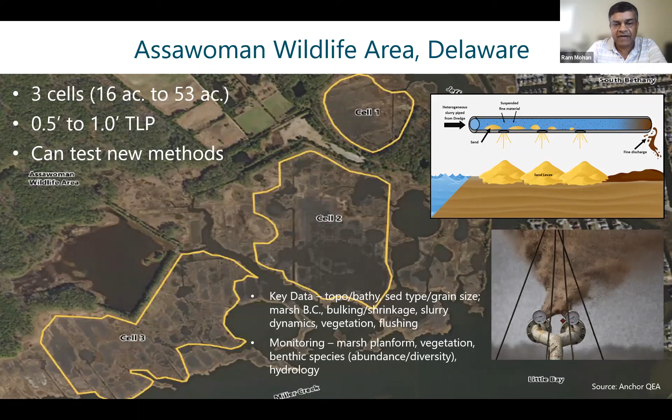I know Catherine's going to talk about Poplar. I'm going to take us back in time, early 2000 when I was involved. We were initially looking at this cell 3D in Poplar Island that you'll hear more about. The only thing I'm going to focus on here is the importance of modeling. So we did modeling in 2 different aspects back in 2000 in the early planning stages of Poplar Island. One was how much do you need to place this material so that it'll settle and give us the elevations we need that were determined from reference marsh surveys.

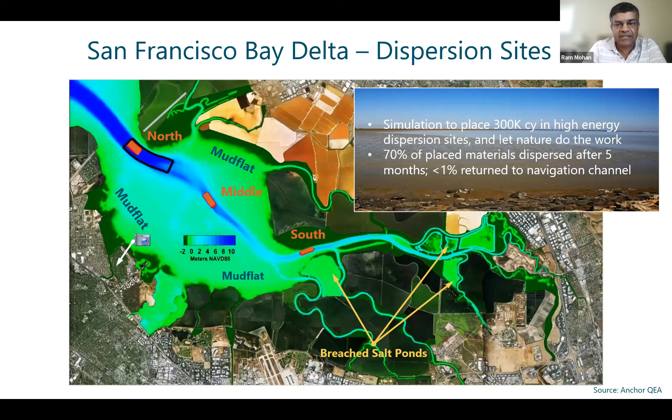But it basically goes from initial planning, assessing risk when you default to nature-based shore protection systems and other features, all the way through design and how monitoring and adaptive management completes the loop by feeding evolving lessons that you then apply to the next design project.

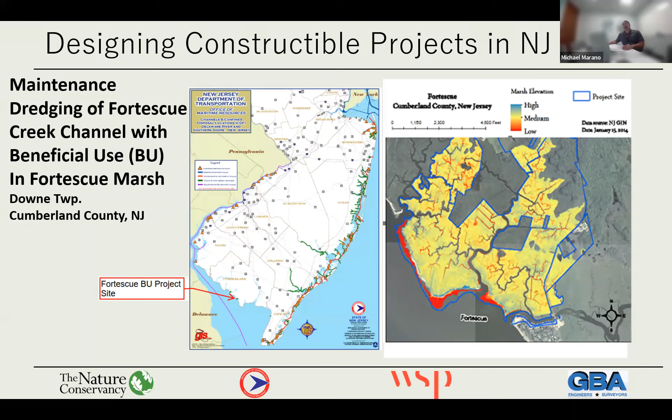Some project partners on this project were the Nature Conservancy and the New Jersey DEP Fish and Wildlife Service. It served the navigational maintenance dredging of one channel, the Fortescue Creek State Channel, and placed about 8,500 cubic yards of fine grain material on the marsh.

About 21,000 cubic yards went in a protective dune that was about 1,100 feet long and about 100 feet wide along the front of the marsh, which actually complemented and protected the more sensitive areas on the interior marsh where we had placed fine grained material.

And then about 7,600 cubic yards in total between two different beach placement areas. One was a non-bathing beach which can accept about 75% sand, and one was a bathing beach that could take about 90% sand. Some of the lessons learned with this project is that placement options are good.

When you have valuable material, the ability to place it in different areas and keep the dredge production as high and as efficient as possible is good for the project and is good for the contractor. So we had available areas to place coarse grain material and available areas to place fine grain material.

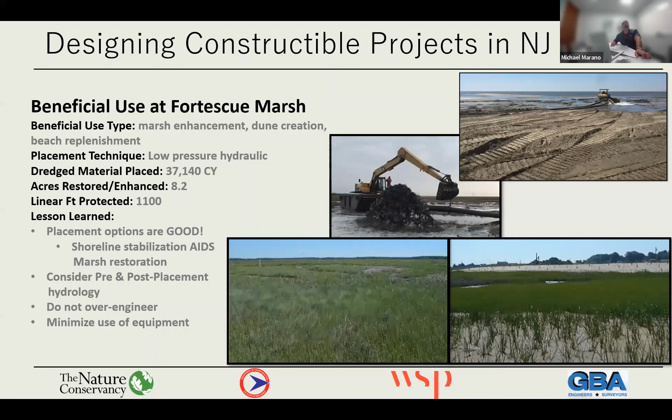Next project I'd like to talk to you about is the beneficial use placement in Good Luck Point Marsh. That is on the mainland of New Jersey, on the Atlantic coast, on the Bay Shore, immediately west of the Seaside Park, Seaside Heights area. That was a maintenance dredging of 4 channels. The project partner on that project was the Edwin B. Forsyth Wildlife Refuge, which is a national wildlife refuge. We placed about 4,000 cubic yards of fine grained material on the marsh and about 8,000 cubic yards of coarse grained material in the near shore berm.

The marsh placement area is shown on the far right. Near shore berm is shown in section view. We enhanced about 5.2 acres of marsh and about 750 lineal feet of near shore berm that was placed. Some lessons learned were, if I go back one and annotate, bear with me, I'm a rookie at this.

In this area here, this is the near shore berm area, and that is Good Luck Point right there in the Barnegat Bay. So we placed material in a berm without any kind of containment or training dikes or anything, and just let the coarse material flow and moved the spill barge along the length of this permitted placement area. And what had happened was, either during or very soon after the placement, a nor'easter came through and moved that sand just right offshore.

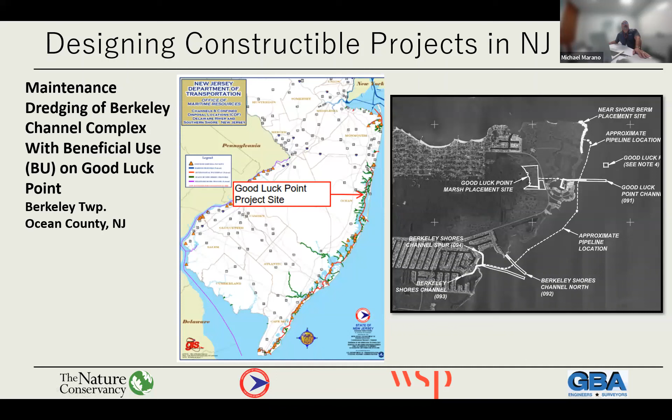So one of the lessons learned was to know the project area and have a better understanding of the currents and the risks. It's kind of hard to predict what a storm's going to do, but maybe do a little bit more modeling in that area, to know how we could better place that sand to stay in place.

The image to the right was an impounded salt marsh. Bayshore Avenue is located here immediately to the east. The Barnegat Bay is also further to the east. And this has a very small micro-tidal environment, like a 6-inch tide swing. The hydrology of this site is only supplied by twin 15-inch pipe culverts in this location and a 36 to 48-inch pipe culvert in this location. So it's not very forgiving. If you place material in a mound, it's going to stay there on this site.

And one of the things that we did learn, as you can see in the picture in the center bottom, is we had to move the inflow pipeline around in order to get good sediment distribution. And one of the added benefits that the contractor found out is that as that pipe moves around, it actually worked as a level and can level out some of the higher mounds as the sediment was placed.

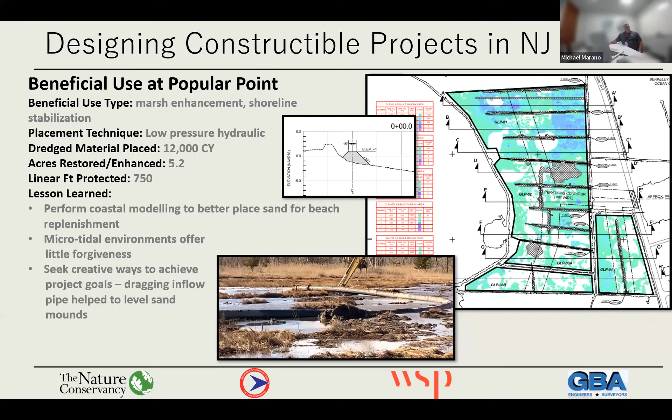Next project is a project that's in development now, and that is the Popular Point project. In the image to the right, the bridge in the upper right is the Route 72 bridge into Long Beach Island. So we're just immediately south of there. Project partners there are the Edwin B. Forsyth National Wildlife Refuge. Again, they own thousands of acres on the New Jersey coast that can use sediment and BU projects. And that development immediately to the north of the project area is Beach Haven West, in Stafford Township, New Jersey. Those lagoons have a large amount of maintenance material that needs to be removed. So they may end up donating some material for beneficial use for this project as well.

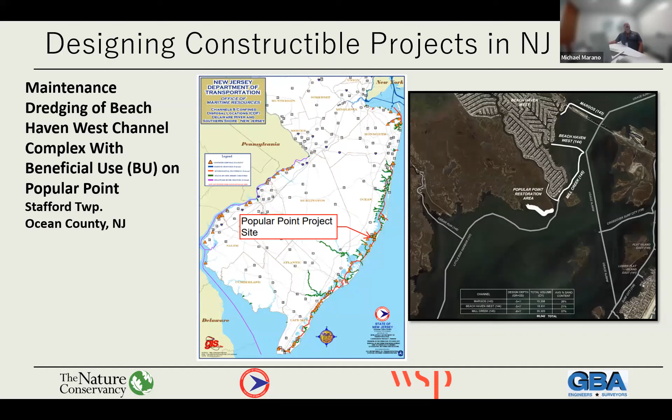The image to the right there, there's marsh enhancement and shoreline stabilization. There are about 4 to 5 state channels that have a dredging need in the area. It's predominantly fine-grained material, except for one of the channels. And the image to the right kind of is a heat map of the fill of the entire site. It's about 125 acres of the marsh proper.

If we do find some coarse grain material, we have the design that's kind of shown in that middle image there, where there is a very low level stone sill, and that's to help with wave attenuation as well as to retain the coarse grain material. Offshore, that follows that yellow alignment. And then there's about 16 acres or about 60 to 65,000 cubic yards of coarse grain material that proposed beach area can house if we do find or have coarse grain material that needs to be beneficially used.

And then the orange outline is a protected dune similar to Fortescue, where you have a good sound shoreline stabilization element to a marsh restoration element behind it, which provides added protection and benefit. Project status right now is permit submissions coming up this fall. Dredging and placement, hopefully summer and fall of next year.

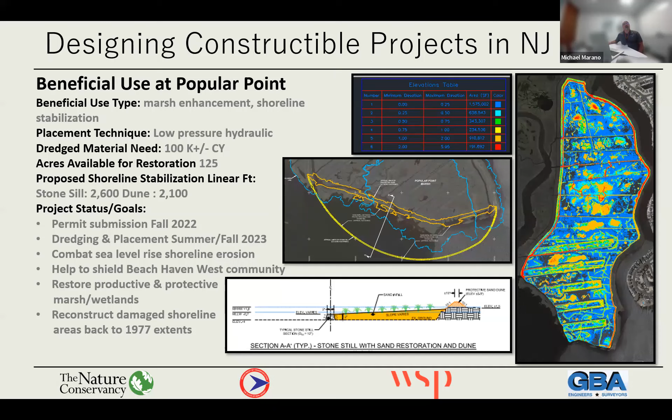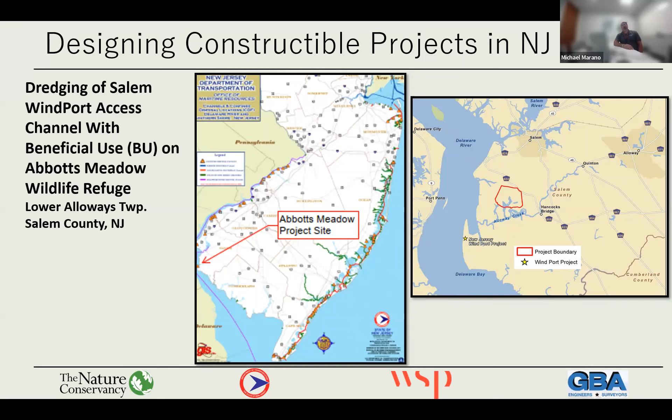And then the last project that I'd like to present to you today is the dredging of the Windport Access Channel with beneficial use in Abbott's Meadow Wildlife Refuge. That's on the Delaware Bay side again of our great state of New Jersey, as shown in the left image, and on the right image is a close-up of the project area. Project partners in Abbott's Meadow are also the NJDEP Fish and Wildlife Service, as well as the New Jersey Economic Development Authority. Main element here is marsh and habitat restoration.

Again, it'll be a cutter suction pipeline dredge, typically much larger than what we're used to in the shallow draft navigation on the Jersey Shore, since it's about up to 1.2 million cubic yards of material that may be used on this site. So it'll be a larger dredge. There's about 330 acres right now identified for restoration. And some of the status and some of the goals are the permit submission is coming up in fall of '22. Dredging needs to be complete by December 31st, 2023.

And because of the sheer size of this site, as well as the size of the dredge that we anticipate may do it, there'll be some adaptive management activities through the spring and summer to try and maximize the habitat creation on this site. One of the main goals is to restore habitat for sensitive bird species, including the black rail and possibly the saltmarsh sparrow. And again, restore the wetlands and restore some diversity. If you see in that image to the left, there is some green, but it's mostly mud flat, and to restore high marsh, low marsh, and some upland.

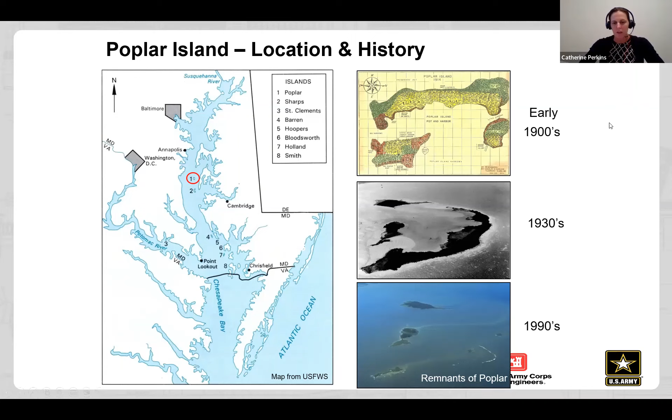And over time, due to erosion, by the 1930s time period, many of the full-time residents on the island began to move off to the mainland of Maryland. And by the 1990s, there were several remnants of Poplar Island left that totaled less than 5 acres in size.

Next slide, please. In the mid-1990s, the Army Corps of Engineers partnered with the Maryland Port Administration and determined that an environmental restoration project utilizing clean dredge material would be an excellent way to provide placement for dredge material and also restore remote island habitat in the bay. So this is an environmental restoration project. That's how it's categorized, but we do have 3 goals that we treat equally.

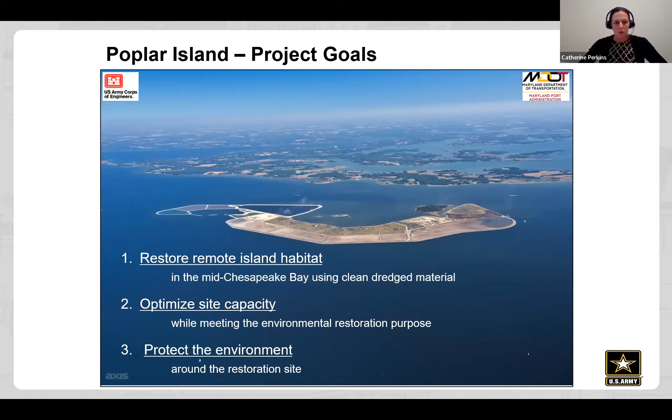While we're restoring habitat, we also are optimizing site capacity, and it's receiving dredge material annually from the Maryland approach channels to the Port of Baltimore. And our 3rd goal is to do no harm to the surrounding environment. Next slide, please.

Poplar Island is currently at its full final size. It's about 3 miles long, and it has been restored to more than 1,700 acres total. The goal is to develop 50% of the site into uplands and 50% of the site into wetlands. We've had about 20 years of experience. The first wetland was restored in 2003, and you can see that was a smaller site, about 25 acres.

And then we've had 8 wetland planting design contracts since then. And our most recent was in 2018, and that was our largest site to date, about 85 acres. Poplar Island is broken into these various cells that you see here to make it easier for them to be developed and constructed. Each of the wetland cells receives about 1 million cubic yards of material.

And I should also mention this is a contained site. The perimeter is constructed of armored sand dikes, and then the dredge material is hydraulically placed into the inside of the cells.

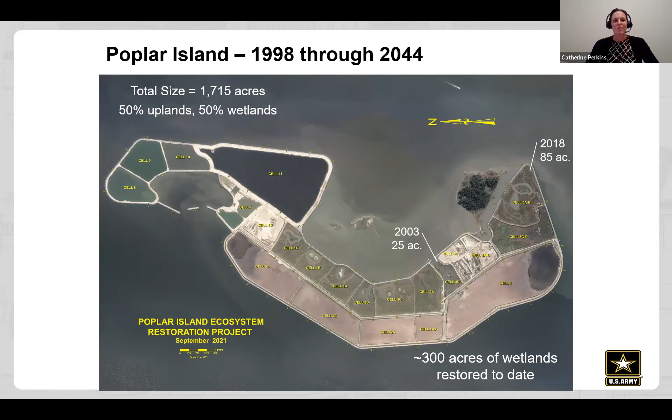My experience: I started working for the Army Corps in 2008, and I was the civil engineer that worked on many of the grading plans and wetland design contracts for 6 out of the 8 contracts we've done to date. And following that, I worked for 5 years as a project engineer, overseeing much of the construction of our recent expansion. And I am currently the project manager. So we've restored about 300 acres of wetlands to date, and we have about another 350 to go. Next slide, please.

I wanted to share the general wetland cell development timeline because it is much longer and much different than many of these other projects that we're looking at. As I mentioned, each wetland cell receives nearly 1 million cubic yards, and that's typically inflowed in several cycles. So about 1 to 4 years is required for the dredge material inflow. And then next, please.

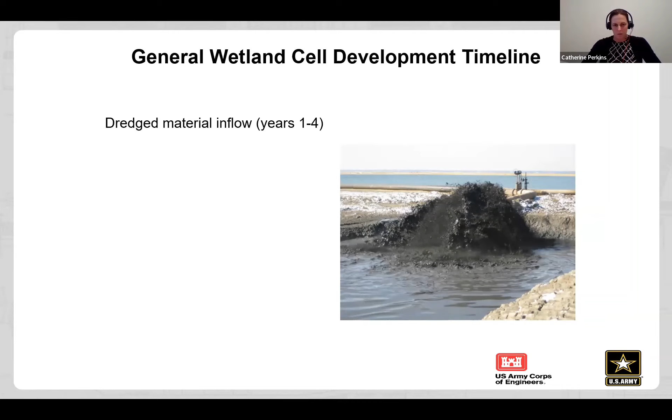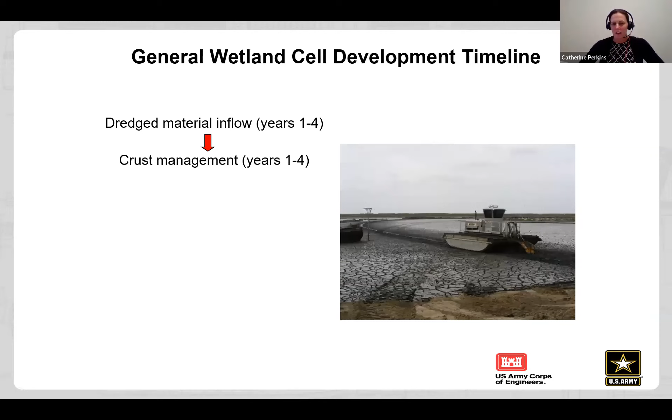And then there is the activity of dewatering the cell and performing crust management. That's because the dredge material that comes in is unloaded and hydraulically slurried and then pumped back onto the island. So that's why in that first picture you could see it's a high percentage of water. In years 4 and 5, we then have the channel excavation and the marsh plain grading. And then after about 6 years, we are finally ready to do our planting.

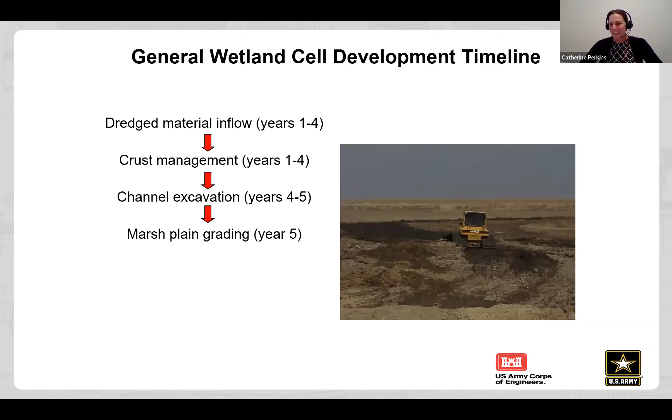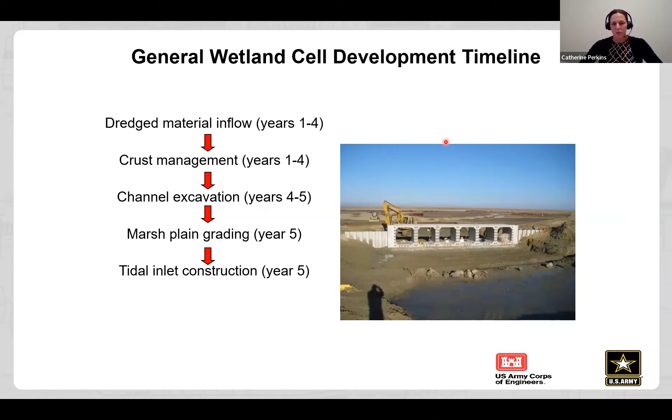Next slide, please. So when I talked to the team about what they thought the primary lessons learned were over the past so many years, we had 3 main categories: the elevations, the actual planting activities, and then contract administration. So first, to focus on elevations, next slide, please.

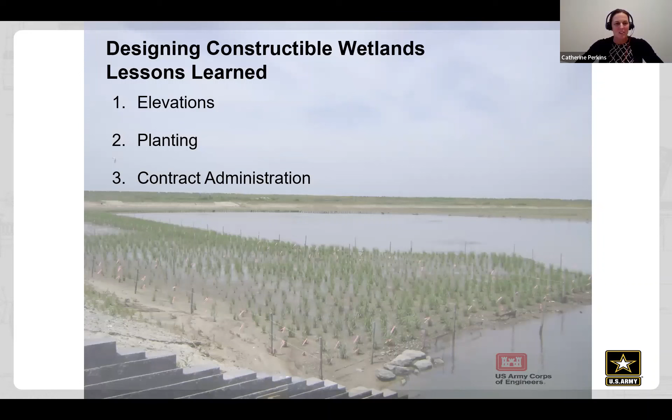We've heard over and over the absolute importance of getting the elevations correct. And we put a huge amount of effort into surveying where the current plants are growing. When we first started, we looked at reference marshes in the area, but now we are lucky we have the advantage of having several hundred acres of wetlands on site that we can monitor on an annual basis and see where specifically the high-low marsh break line is. And we have seen it creep up quite a bit over the decades due to sea level rise.

We also spend a lot of time with our engineering team looking at the dredge material consolidation and settlement, and we do annual assessments of the material and the water content, and there's an exercise to estimate void ratios and determine which areas of our wetland cells are going to settle and which ones are more stable. And then we develop the grading plan based on coordination with our engineering team.

We typically have several iterations of this grading plan, and our recent focus has been on positive drainage and minimizing ponding of water on the site. We used to have just a low marsh elevation and a high marsh elevation, and we would just do flat plains where the low marsh would be one elevation, then you would have a physical step up to the high marsh elevation. And we've recently eliminated that step, and for the past 15 years or so, we've really focused on building high. We often give the construction partners plus tolerances for the target elevations, but no minus tolerances.

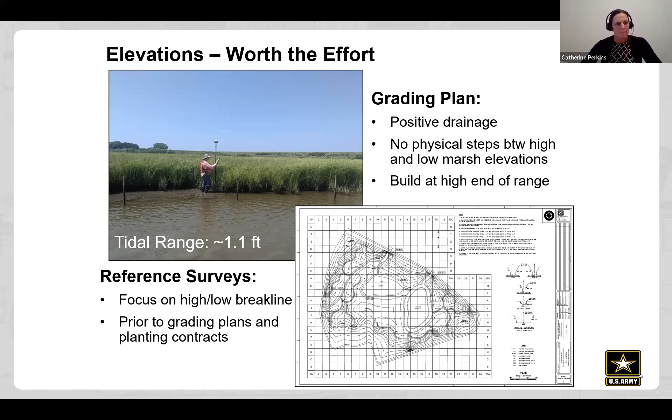The next thing was the actual planting itself. When we start to do our concept design, we engage our partners very early. We just had a meeting 2 weeks ago for our next wetland design, and we presented a concept for planting that's going to take place in 2027. So we really try to start early and get feedback on what our research partners are seeing on the ground, both at Poplar and at other sites around the bay.

One lesson that we've recently taken into account is always including high marsh around the perimeter of our site. For the low marsh, we typically plant Spartina alterniflora, and this gives the low marsh room to move back and retreat to higher ground as we see this increase in sea level rise. We've also had a recent focus on including more diversity of high marsh plants. And when we utilize woody vegetation, we try to use it in a way that we are working with the environment to create natural windbreaks for different habitat features.

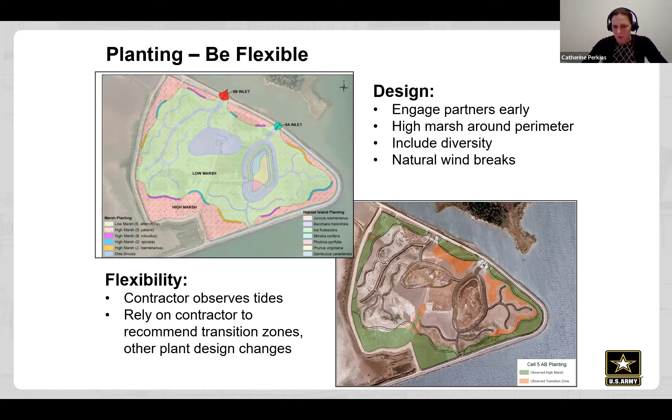We also rely heavily on our contractors. When they arrive on the site, they'll spend a couple weeks observing the tides and recommending some tweaks or changes to our planting plan. So the biologists have realized that these are the guys on the ground, and that it's really helpful to allow the contractor to make changes in the design and recommend what they think would be the best for the overall success of the wetlands. Next slide, please.

So we've learned that as important as the wetland design is, the contract acquisition strategy and the administration of the contract is also critical. The Corps of Engineers typically uses technical acceptability criteria for these wetlands. We've found that rather than doing a lowest bidder contract, we've had more success doing low price technically acceptable contracts where we have specific criteria required for contractors to bid on the job. And this has been more successful for us than requiring warranties on the plant success.

We also typically do multi-year contracts. The first year is for the contractor to collect seed and grow the plants. We usually do a nursery visit and are very involved in that first year process. The second year is when the actual planting and seeding takes place. And then the third year, we recently started having the contractor come back out to the site and remove any bird deterrent. And it also provides an opportunity for them to evaluate the plant growth and make any recommendations.

And the third critical piece here is the requirement for detailed surveyed as-builts. We did about a decade of contracts where we have very poor records of exactly where the plants were put in the ground. And over the past 10 years, requiring survey data and more detailed CAD drawings has really helped us, so that we can come back 5 years later and see how the elevations are changing.

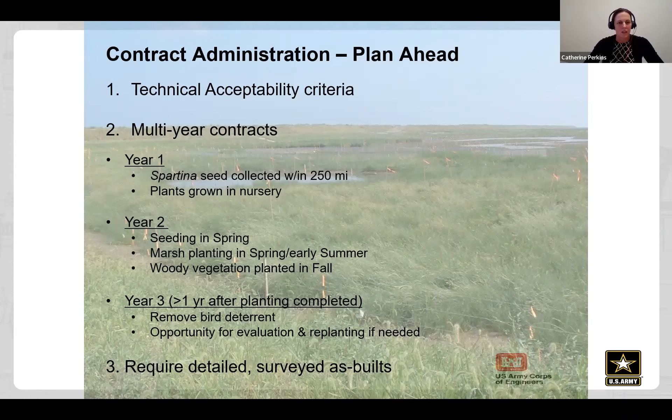Thank you so much, Katie. I think there's a lot of ways to leverage the intense research and experience that you guys have at Poplar Island to inform some smaller projects. So I really appreciate your time in joining us today.

All right, thanks everybody. So I'm Chad Sumner, principal of Sumco Eco Contracting. Arrived at this discussion, started doing salt marsh restoration from the land side, probably back in 1999. Did some salt marsh hay farming, so became very intimate with the marshes there. 3 years ago, we launched an affiliated entity, Resilient Seas, which does hydraulic dredging, and a lot of the appeal for us in that respect was the crossover for this exact purpose that we're talking about, beneficial use of materials for marsh and ecosystem restoration.

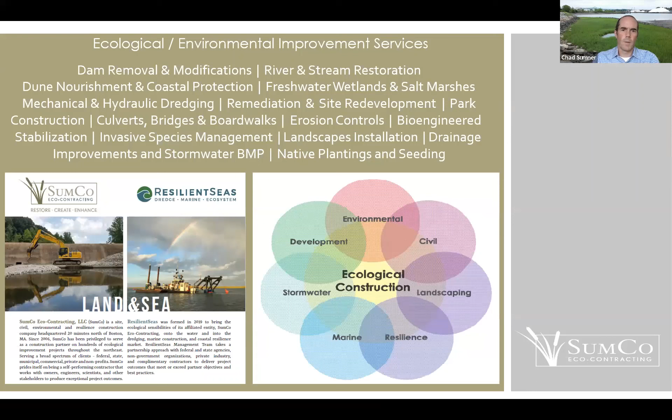So that's just an overview of the diversity of the services that we get involved with, but obviously talking about beneficial reuse of materials today. So I'm going to focus on one project. This is the Narrow River Resilience Project in Narragansett, Rhode Island. In this case, Adriana, in the introduction, alluded to the 3 different types of marsh beneficial use projects. There's the expansion, the thin layer placement, thick layer placement. We called it thin-ish layer placement in a couple of iterations here. This project actually had all 3 of those.

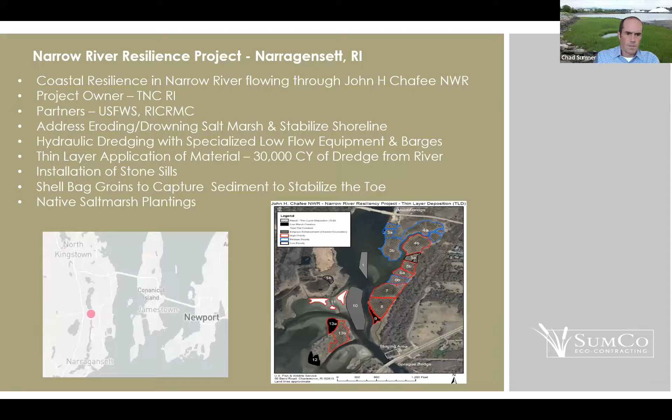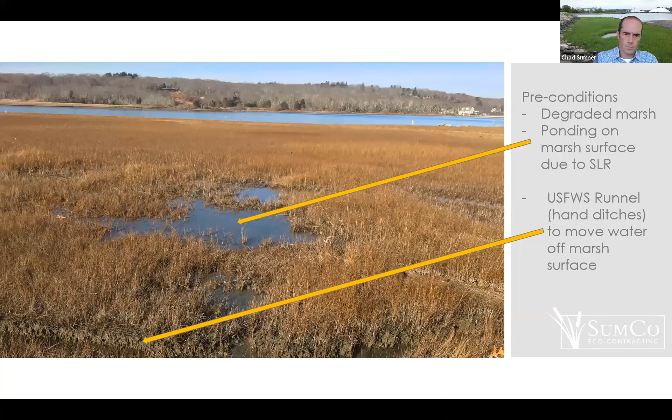So on the marsh surface elevation, this is some of what they were starting to see, which is typical of marshes that are degrading. You get some water impounding on the surface, and that compounds itself with degradation of the marsh surface as the vegetation fails. You get the peat. In this area of Rhode Island, probably had 2 to 3 feet of peat establishment. As we get up into the Great Marsh area up in Massachusetts, we've got areas where we've got 8 to 10 feet of peat across the full tide range. So that degradation certainly was part of the factors we were looking to address.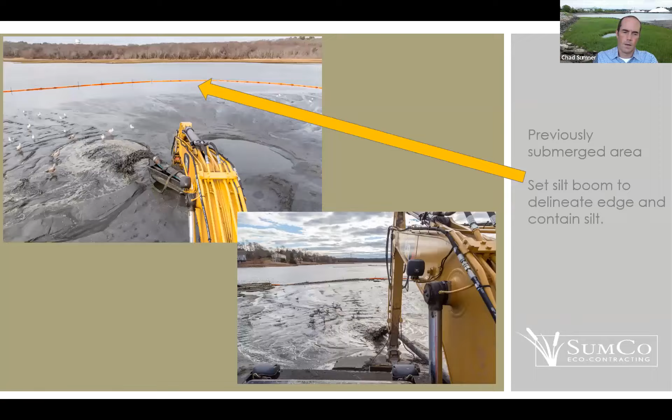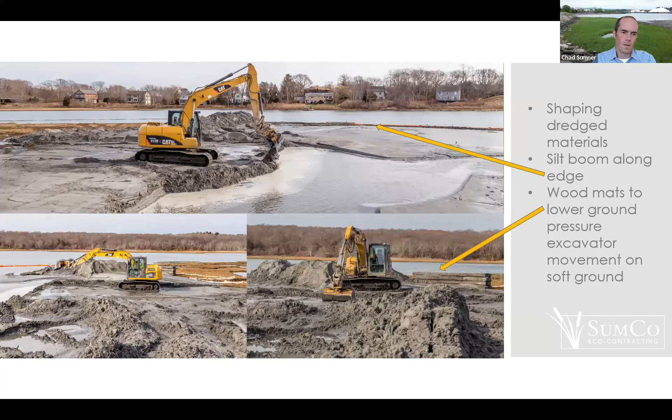So in addition to managing the discharge of that material, it was grading off to the design grades of the marsh system. So this area was contiguous to what they called Sedge Island, which was a marsh and upland area on the island side of that channel that we saw in the overview initially.

And then on the marsh surface itself, placement ranged from 1 foot down to a couple inches. If we look back at the original overview, the focus was starting on the upland center part of the marshes to maintain positive drainage towards the existing channel. All of those outlined areas had tidal creeks associated with them, so we're trying to stay out of those and certainly clean those up as we were moving out.

But this one was not so much a, hey, we need X number of thousand cubic yards to fill the entirety of these marshes to a certain elevation. It was, we have so much material coming out of the channels, start in the middle. So there were designated placement areas depending on the stationing of the channel, designated marsh cells. So we started in the middle of the cells and worked out as far as we could from there.

So you can imagine that if we were targeting a certain high marsh elevation, we started in the middle, hit that target, and then as we ran out of material, that feathered off. So we ended up with some areas with thicker placement and some areas where it petered out into the last little bit of slurry.

But as you see here, we had a mini excavator on the marsh. I believe we have another shot of this, we'll come back to it. We also had a low ground pressure skid steer for grading off any areas where that stacked up. But overall, the intent here was a uniform placement within the areas receiving the dredge material.

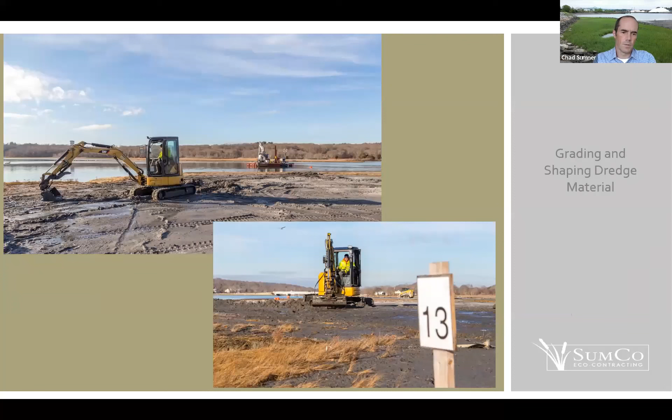As part of the containment and shoreline stabilization, in addition to the expansion, this is the Sedge Island as well. In that bottom right picture, past the excavator is where the expansion was taking place, but the near side is also where the channel came through. So there's a really steep bathymetry in that location, and some erosion taking place on the edge of the island. So in addition to building off the back, they wanted to stabilize the front edge. It's a combination of treatments there.

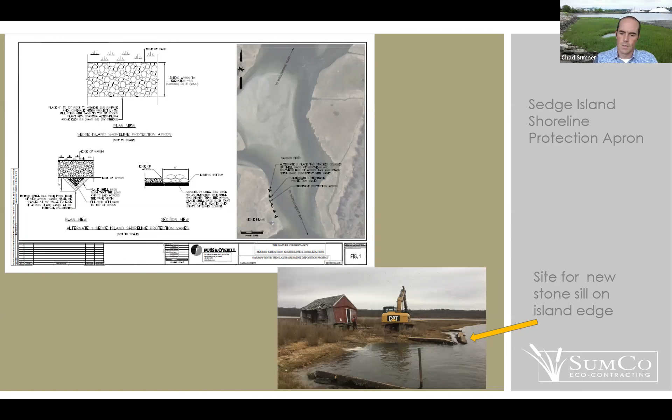One thing that was interesting about this project is prior to this effort, for a number of years, the Nature Conservancy did some pilot studies along the area of marsh up by the canoe and kayak facility, where they did coir bank stabilizations, shell bags, geotextiles, a host of test edge stabilization measures.

And the issue here really is because we only had that 2 feet of peat, it was underlain by sand. So with all the boat traffic, part of the edge degradation was the sand was getting washed out, and then the peat would fall, and then sand would wash out and the peat would fall. So they were really trying to stabilize that sand layer beneath the peat against the erosive forces.

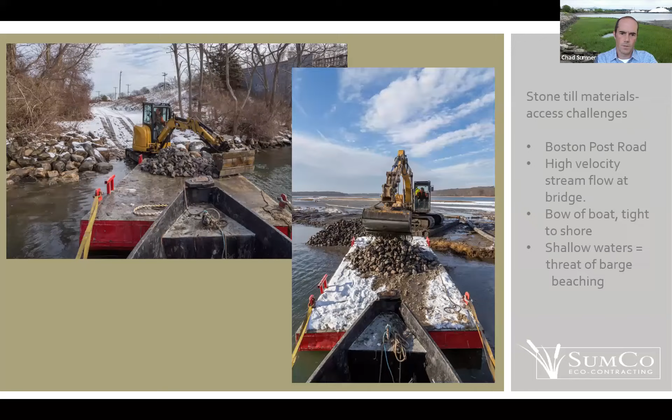There were a couple of different treatments: rock, oyster shell bags, and then the coir logs. As you'd imagine, the coir logs disappeared within a year or two and were not a long-term solution. You're not going to get vegetation growing below that range. So when we came out to do Sedge Island, the treatment involved the shell bags, in addition to some chokestone sill on the surface.

So that's after completion. You've got that chokestone material. We actually blended some of the dredge material into that to promote future natural recruitment of vegetation. And those triangles are the shell bags, intended to interrupt flow, trap some sediment between those triangular points and add to that shoreline over time.

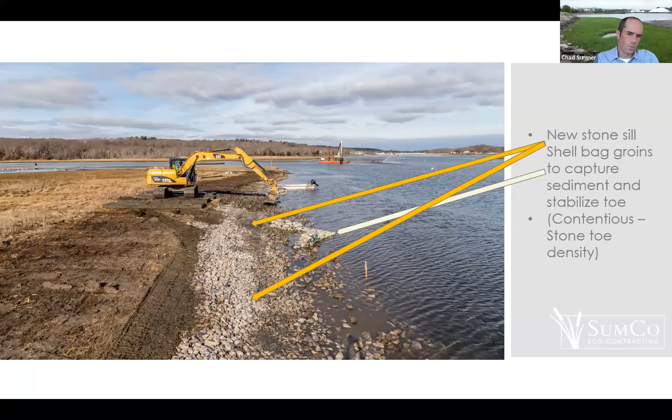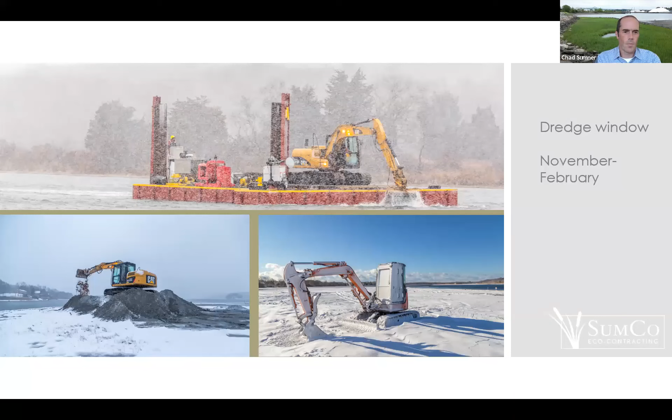Love our environmental work windows in the Northeast. Generally, the joke is that if you abided by every available window, you wouldn't be able to work. This is the one that tends to be, from an endangered species and fishery standpoint, the least disruptive to them. You just hope for not too many of those days from an operator standpoint, and it also results in shorter days. So certainly a challenge working around the time of year that we face there.

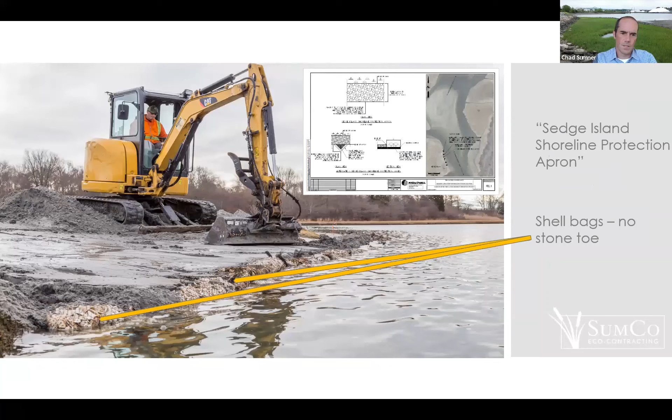There's an additional section of the Sedge Island where it was just the shell bags, no stone toe treatment. And then particularly in the new construction area, as well as the thicker placement areas, there was volunteer planting of those areas.

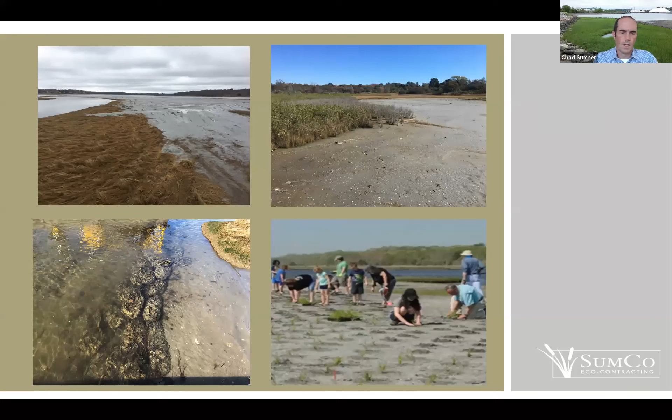One of the things, and we'll get through the lessons learned, I think are coming up, that this came to challenge a little bit with, is because the fine sand settled so densely, they had some issues with the new plant establishment. So that is still something we're working through.

A couple other things that I alluded to coming through it is the pilot treatments. Coir logs, obviously not something that's going to be a sustainable stabilization measure below vegetation range. Sometimes they're used either at toe slope between high marsh and transition zone into coastal bank, or in areas where there may be a step in grade between high marsh and low marsh, depending on how folks are approaching that. I certainly, from our experience, agree with how USACE has been dealing with Poplar Island and not having a step. Either way, if there are coir logs, that's where they would tend to go. And the shell bags will probably end up using.

Marsh Island edge treatment, we saw the pictures of those. For marsh placement, we didn't really require an edge treatment. As I said, we kind of stayed back from the edge of the channel. We were starting in the middle and working out, and net of it was that the amount of material available in the channels wouldn't have overflowed to that edge anyway.

And then on the material placement itself, that fine sandy material did stack up a little bit. Again, saw what was happening when we were executing the expansion. That stuff drained and settled up pretty quickly. So that's where we had the low ground pressure skid steer and excavator supplementing some of that placement. Then went through the rest of those.

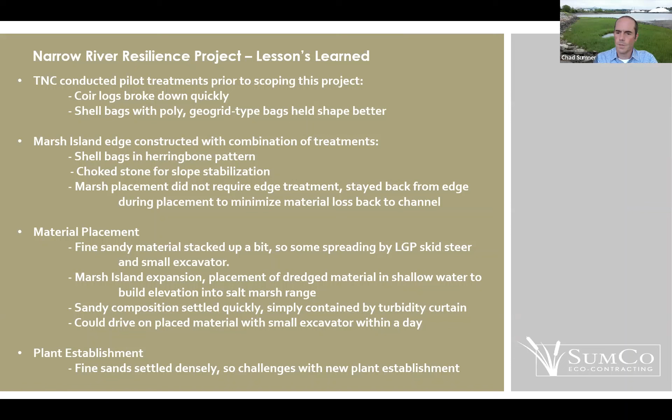So upside there is because it was fine silty or fine sand, the turbidity curtain was pretty much all we needed for containment in those building areas. And the upside certainly with that material type was being able to drive on that material within that first day. So that's the gist of that run. Saw a lot of really compelling elements of what we're looking at from beneficial reuse placement.

There have been a couple others up at Ninigret facility that we completed last year, and then for Nature Conservancy, also under Sandy, not a dredge material placement, but a thin layer placement at Sachuest Point National Wildlife Refuge. It was an upland borrow source that came from one of the towns, had some sand material with shell material in it, and similar type of thing, but placing 12 inches and down, requiring planting as well.